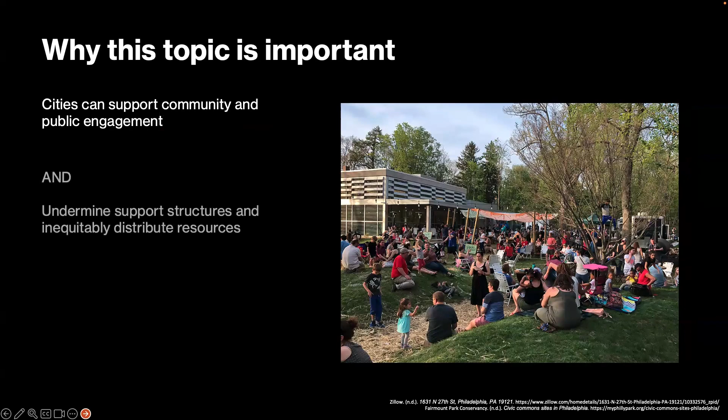So first, I'd like to start with why this topic is important. Well, cities are made up of spaces that can be beautiful, welcoming, and healthy. And they can be unwelcoming, isolating, and impair well-being. Cities can support community and public engagement, and they can undermine support structures and inequitably distribute resources.

Cities can regenerate the ecosystems that have been removed for development and support the services they naturally provide, such as cleaning the air and water, absorbing stormwater, growing food, and providing open space for improved mental and physical performance of their occupants, such as this proposal for FDR Park.

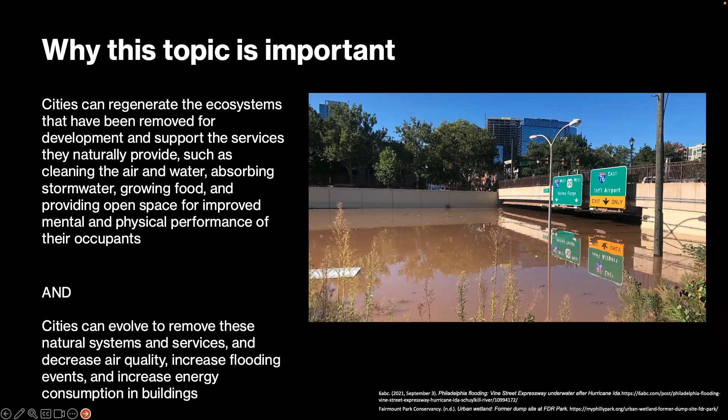And cities can evolve to remove these natural systems and services, decreasing air quality, increasing flooding events, and increasing energy consumption in buildings.

Cities are systems comprised of elements in a complex relationship, such as people, communities, homes, office buildings, hospitals, parks, and all of the infrastructure to serve them. These systems can be designed, developed, and integrated to support community engagement, improve city performance, and occupant well-being. And they can be designed, developed, and lack integration to instead support different values and very different outcomes.

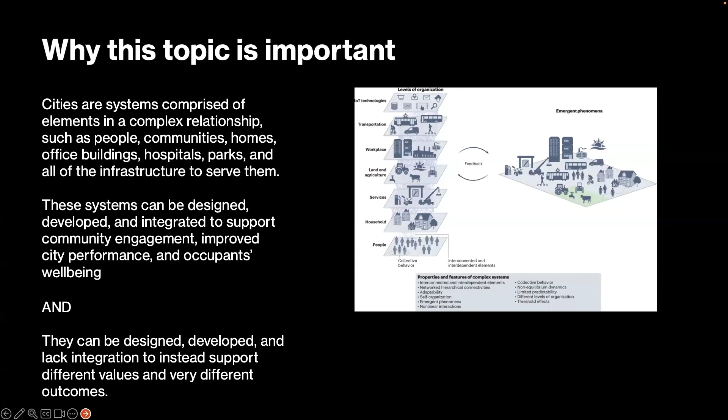Every system is perfectly designed to achieve exactly the results that it gets. And so the major point that I'd like to present to you today is that the environment created by a city is powerful and has a very significant impact on our individual and collective lives.

Dr. Claudia Miller became known for perhaps a controversial statement that says architects and designers have a greater ability to improve public health than medical professionals.

In fact, the architectural profession itself has a code of ethics and professional conduct statement document, which has at its core that architects must use their professional knowledge and skill to design buildings and spaces that promote the health, safety, and welfare of individuals and the public.

And of course, it being made of professionals themselves, they sometimes critique the professional code of ethics and professional conduct and urge for its development.

And indeed, in 2018, they added an additional statement to Canon 2 about their obligations to the public to now include environmental equity and justice, where members should promote fairness and safety in providing professional services and make reasonable efforts to advise their clients and employers of their obligations to the environment.

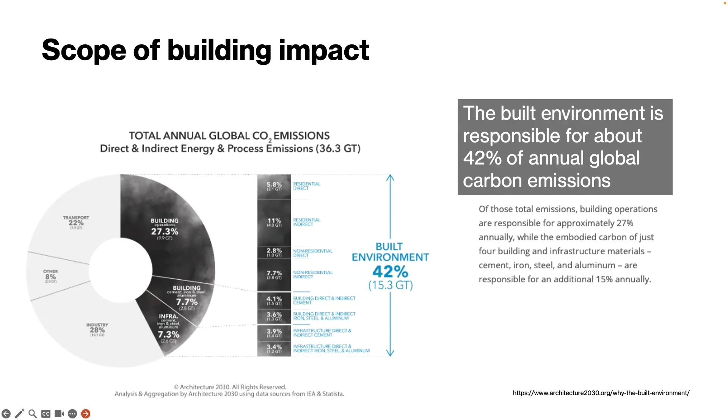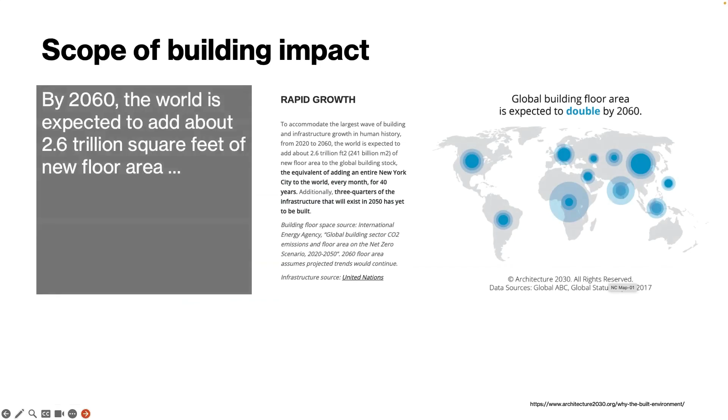There is also projected rapid growth in development globally. By 2060, the world is expected to add about 2.6 trillion square feet of new floor area. So to give you some perspective, that's the equivalent of an entire New York City added to the world every month for 40 years. So this could be a very pessimistic look forward, especially if we are just thinking that we are going to keep designing the way that we have been.

But I would like to argue that this is also an opportunity for us to choose a different direction and to design differently. And I'll give you some examples of how we could, as a profession, all of the design professions could start to design differently so that this development could take place, but our emissions could actually come down.

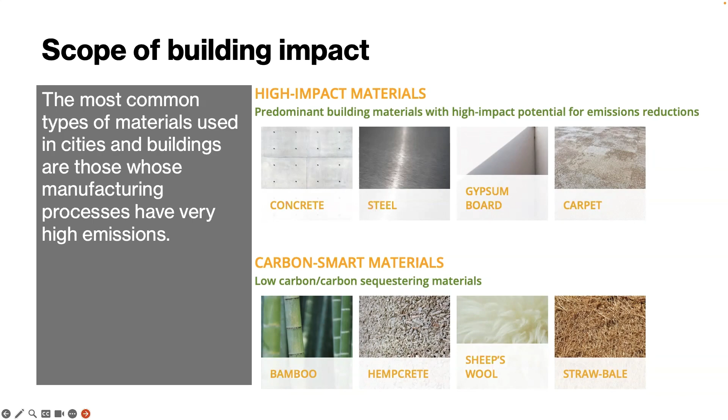So there are high impact materials and some carbon smart materials, and the material choices we make are extremely important because of what's called embodied carbon. The most common types of materials used in cities and buildings are those whose manufacturing processes have very high emissions. We're talking about the process to extract a material, ship it to another facility to manufacture and produce it, all the energy involved in that process, and then eventually shipping it to a site and putting it into use in construction. So all of the energy for materials right before people move in and start using the building is called embodied carbon. The types of materials we use can make a huge difference on the carbon emissions associated with buildings.

Specifically, we want to avoid the use of concrete, steel, gypsum board, and carpet—those are the high impact materials. There are other materials we could use that are low carbon, carbon sequestering materials, such as bamboo. I would also add in timber, hempcrete, sheep's wool, and straw bale.

Now let's go on and look at the scope of the health impact. We'll look at heat illness, air quality, vector-borne disease, and mental health. Looking at the heat vulnerability in Philadelphia, we see here a map from the city of Philadelphia indicating the heat vulnerability score, which summarizes the key factors associated with negative health effects of extreme heat events. This report, Toward a Climate-Ready Philadelphia, suggests that extreme heat events in Philadelphia will increase in duration, frequency, and intensity due to climate change.

The neighborhoods highlighted on this map will feel it worse than others. The Centers for Disease Control and Prevention state that extreme heat events can lead to a wide range of health problems, including heat exhaustion, heat stroke, rashes, and cramps, as well as worsening existing medical conditions. Social and demographic characteristics like age and socioeconomic status contribute to a person's sensitivity to extreme heat, and those are reflected in this map, which includes the population's sensitivity to heat effects, its exposure to hotter environments, and the population's ability to adapt to extreme heat.

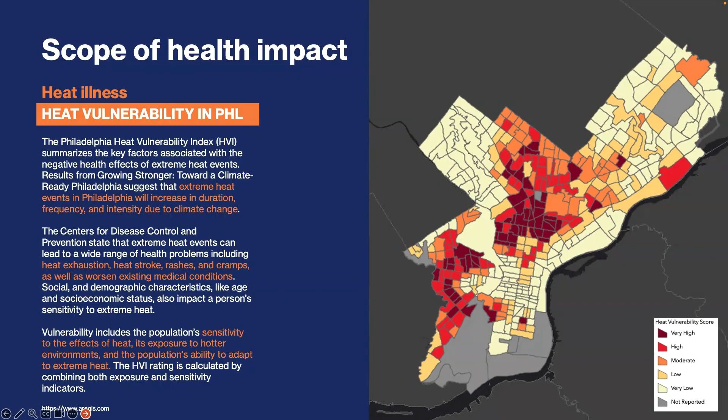The built environment definitely comes in here with a population's ability to adapt to extreme heat, and we'll be discussing some of those adaptable behaviors later on.

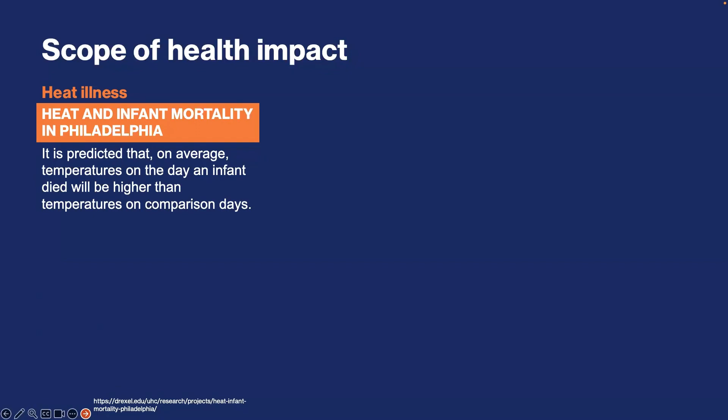According to research out of Drexel, heat and infant mortality are also linked in negative health outcomes in Philadelphia. It's predicted that on average, temperatures on the day an infant died will be higher than temperatures on comparison days. They also hypothesized that these associations are stronger among infants living in census tracts with higher percentages of residents living below the poverty line, with less than a high school diploma, and who are Black and African American—areas showing very high and high rates of heat vulnerability. Lastly, these associations are expected to be stronger among infants who had less tree canopy and less vegetation near their homes.

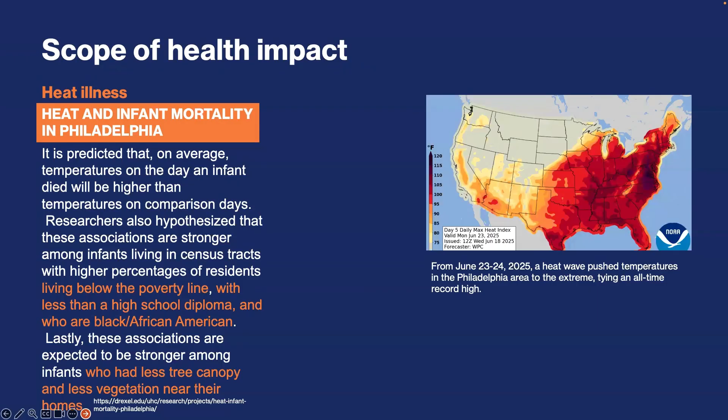So we can remind ourselves that indeed heat is increasing, and these could become greater issues to deal with. In 2025, a heat wave pushed temperatures in the Philadelphia area to the extreme, tying an all-time record high. The Philadelphia region also sees record temperatures. A report shows that heat illnesses and health risks among indoor service workers is widespread, and the most recent decade was the warmest on record. Given the rising average temperatures, heat represents an increasingly important factor in the work lives of people in the US and globally, and we can expect more of this to happen in the future.

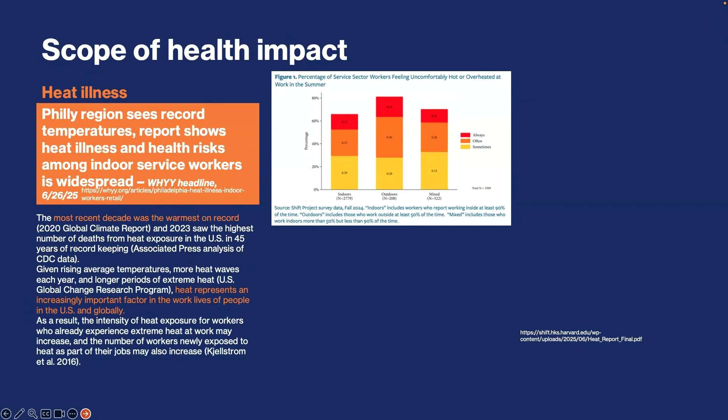If we look at air quality, the Philadelphia metro area ranks worst, most polluted in the mid-Atlantic, the 35th worst in the US for ozone smog. We do show some improvement for particle pollution, but we still earn a C for daily and an F for annual particle pollution.

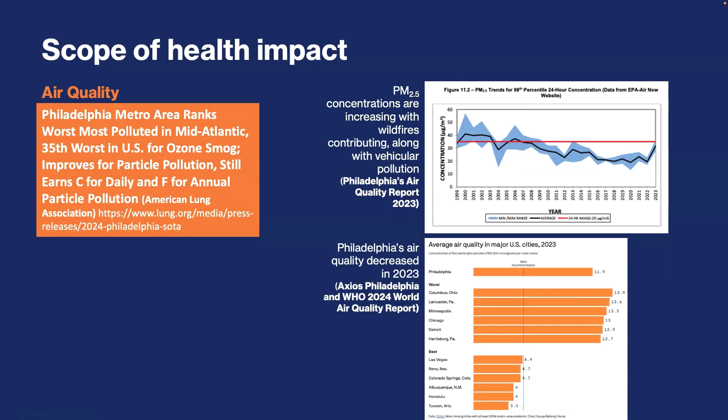If we look at vector-borne disease, two main contributing factors are increased temperatures and increased interaction between people and these vectors. Temperatures are increasing, making it more hospitable for some of these insects and pathogens. And by virtue of where people are encountering these, that is increasing as well due to development. So climate change is altering the regions where vectors, such as insects and pathogens, can live and thrive, and increased development brings humans into more contact with these vectors.

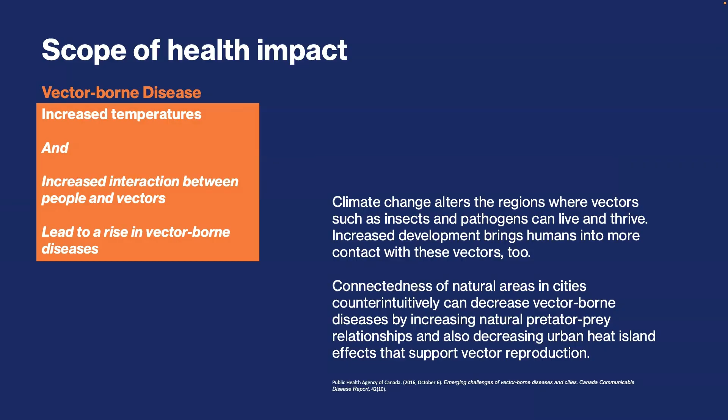Now, an interesting thing is that if we add additional green spaces and green infrastructure like parks and pocket parks, that connectedness of natural areas in a city can actually, and perhaps counterintuitively, decrease vector-borne diseases. That's because when you increase this connectedness, there are more natural predator-prey relationships that are able to take place. But it's also because the temperatures will go down, since we will be decreasing the urban heat island effects that support vector reproduction. In case you don't know what the urban heat island effect is, I will also be discussing that later in this presentation.

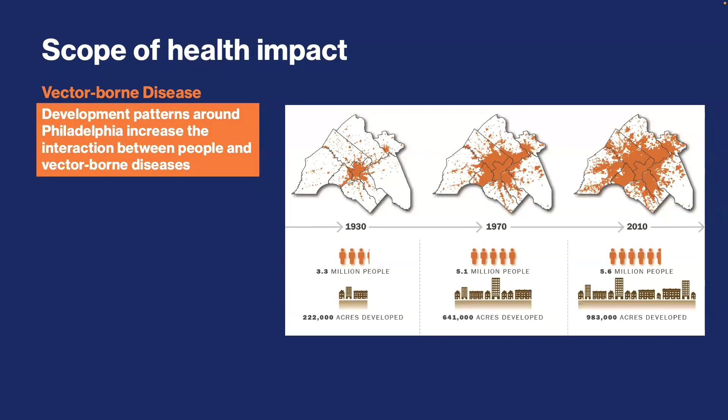This shows the development patterns in the Philadelphia area since 1930. You can see that we have been exploding in the surrounding environment, and so the development patterns around Philadelphia are increasing the interaction between people and vector-borne diseases.

Here is an example of that, where the Philadelphia Department of Public Health has identified 3 symptomatic West Nile virus infections in 2025. 2 of them were locally acquired. And if we look at the positivity in WNV, in 2025 that positivity is higher than the year-to-date historic median rate from 2001 to 2024.

Mental health is greatly impacted by the built environment. Human beings spend more than 90% of their lives indoors. Yet, according to Evans here, whose research I'm pulling this information from, we know much more about ambient environmental conditions and health than we do about the built environment and health.

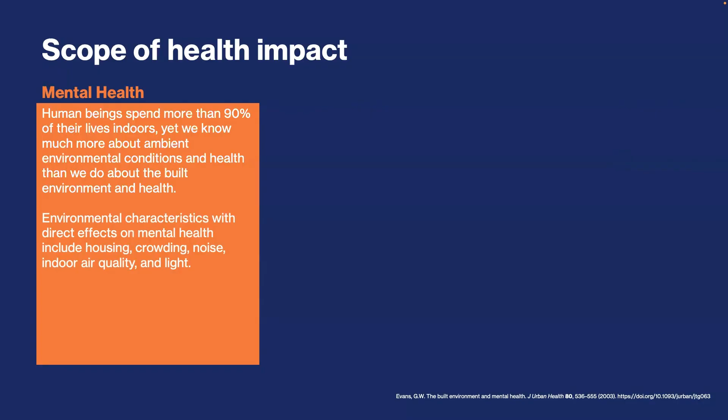There are some environmental characteristics with direct effects on mental health, including housing, crowding, noise, indoor air quality, and light. The built environment controls mostly those environmental characteristics and how they design buildings, cities, and neighborhoods. And the built environment can indirectly impact mental health by altering psychosocial processes with known mental health consequences.

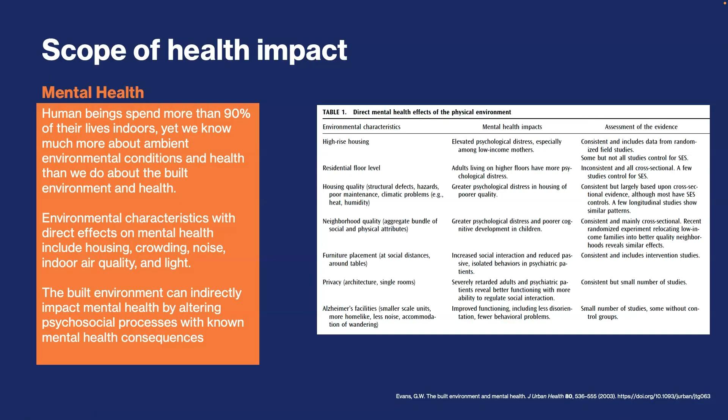The quality of housing, like structural defects, hazards, and poor maintenance, leads to greater psychological distress in housing of poor quality. Neighborhood quality, and how socially connected these spaces are, can also contribute to greater psychological distress and poor cognitive development in children. Even looking at Alzheimer's facilities, designing them with smaller scale units that are more home-like, with less noise and that accommodate wandering, has been shown to improve functioning, including less disorientation and fewer behavioral problems.

Dr. Ulrich is probably a more well-known researcher for architects, and definitely for sustainable designers, because of some of his research. This research shows that modifications can be made to reduce hospital noise, prevent the spread of infectious agents, reduce stress and fatigue, and more, through design rather than modifying staff behavior and organizational culture.

What Ulrich really became known for was a study he did in 1984 that compared patients who had undergone surgery, where half of them stayed in a room with a view of a park with deciduous trees, just a nice view out of their window, while the other half were in a room with a view of a brick wall. And guess what? Those with the view of nature required less analgesia and had reduced length of stay in the hospital.

This became part of the evidence used to support a hypothesis called biophilia. Biophilia is the notion that humans have evolved to recognize spaces and places where their well-being would flourish. Thinking about migration patterns over the course of evolution, starting in Africa and then moving out, humans seem to have an innate, evolved ability to recognize healthy spaces over unhealthy ones, and that this has an impact on both our mental and physical well-being. This study by Ulrich supports that.

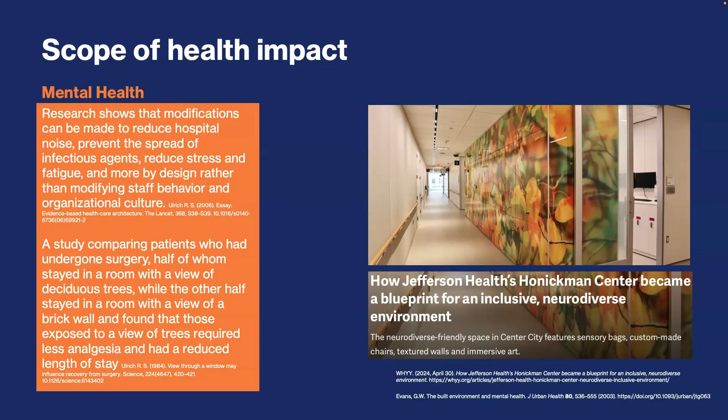Now this idea of biophilia has moved into design, where a lot of design is focused on trying to connect people to nature to achieve exactly these sorts of positive outcomes. We see an example of this even with Jefferson's own Honickman Center and how it has been designed. Studies have shown that even facsimiles of nature, although not as great as being really in nature, still have a positive outcome, such as the blossoms and trees printed on this wall. These things can be used as part of the design of the built environment.

Let's take a closer look now at climate drivers. Climate change really is a global phenomenon that has a local impact, and that's mostly how we experience this global phenomenon. The largest contributors to this are greenhouse gas emissions and land use change.

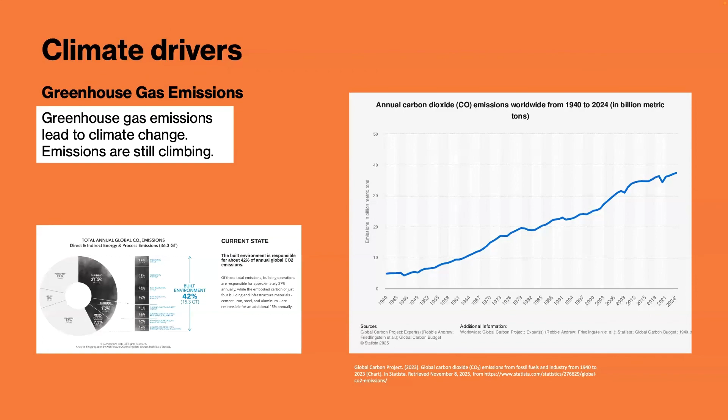As I touched on briefly earlier, greenhouse gas emissions lead to climate change, and emissions are still climbing. If we look at the graph on the right, this is the annual carbon dioxide emissions—it says dioxide but only shows CO, that is not my error—worldwide from 1940 to 2024. Clearly there's an increasing trend, and we're all expecting that to just increase. Just a reminder that of these metric tons of CO2 emissions, 42%, almost half, is from the built environment.

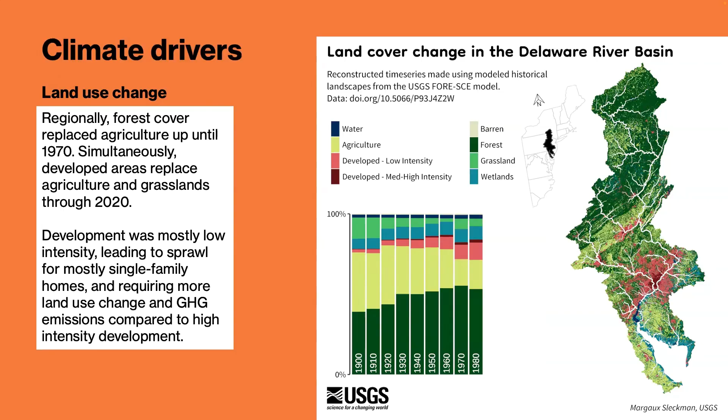So this is a major driver of climate change, part of which is parking lots. We have a lot of parking, as many cities do, but ours is about 3.7 times greater than our housing density. Now, the bad news is that most of these are what are called off-street, but on the surface. So these aren't the ones that have multiple levels to parking. These are ones that are just on the surface, and that is it. So it's not an efficient use of space because you're not parking ones above that space, like in a structured parking lot.

So now let's talk about the urban heat island effect. This is a phenomenon that happens around all cities, not just Philadelphia, and it's because of the materials and the geometry of the buildings. The fact that there are a lot of high-rise buildings makes the situation worse, it increases the urban heat island effect. So what this basically says is that the temperatures, if you were to scan the greater Philadelphia area, are going to be lower in our suburbs and rural areas than they are in the city.

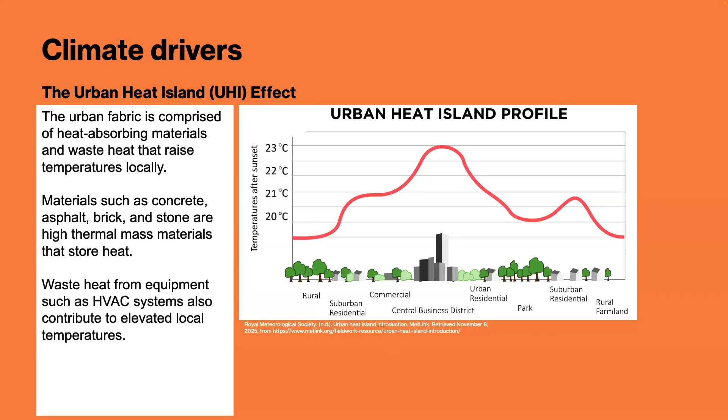This is because the urban fabric, as we call it, is comprised of heat absorbing materials and waste heat that raise temperatures locally. Materials that we always find in cities, such as concrete, asphalt, brick, and stone, are high thermal mass materials that store heat. Thermal mass materials just mean they have a lot of thermal mass where they can absorb and store heat within them. There's also waste heat from equipment such as HVAC systems, which also contributes to elevated local temperatures.

So in Philadelphia, what we find is that compared to the suburban and rural areas, our temperatures are 5 to 12 degrees higher on average, but there are some specific parts of Philadelphia that can be as high as 22 degrees hotter than other neighborhoods. So the urban heat island effect is among the top two issues that Philadelphia faces from climate change. The first probably being flooding, but we'll get to that later.

So with land use change and development, we see that the ecosystem services that we tend to take for granted get replaced with parking lots, with buildings, with roads and streets. Ecosystem services are those things that nature provides to us for free that are systematically removed by land use change. Now, these services are not part of economic models. So the change of land use, or the fact that we don't have clean water or less biodiversity, does not negatively impact our GDP, right?

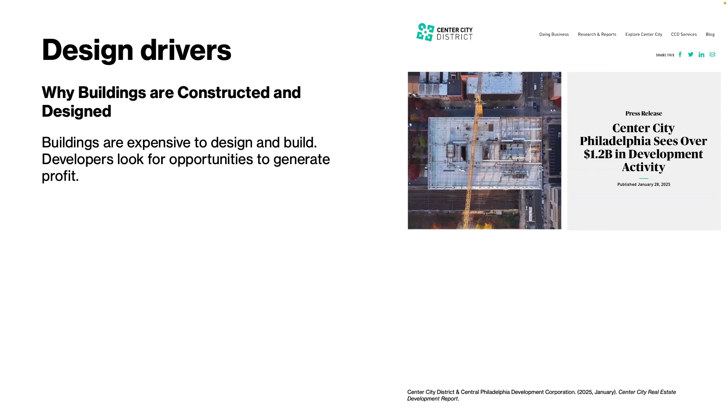And there has been a lot of economic construction activity over the last year in Center City, where it's seen $1.2 billion in development activity. And what kind of activity was that? Well, it was mostly residential, and then had mixed use, healthcare, and education as the top three.

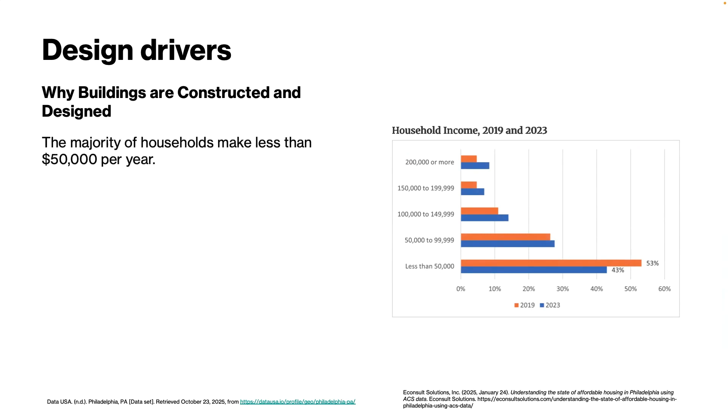So the large majority of new construction is residential, which is good news, right? It should be because there's a strong need for housing in Philadelphia. So let's look closer at what housing was created, at housing and household income. We can see that the majority of households make less than $50,000 per year. Actually, Philadelphia has more families and people below the poverty level compared to both Pennsylvania and the US.

And so those who make less than $50,000 per year are also house burdened, with housing costing the majority of them 50% or more of their income. In fact, you are considered to be house burdened if you spend more than a third, or roughly 30%, on mortgage, rent, and all of the utilities for your home.

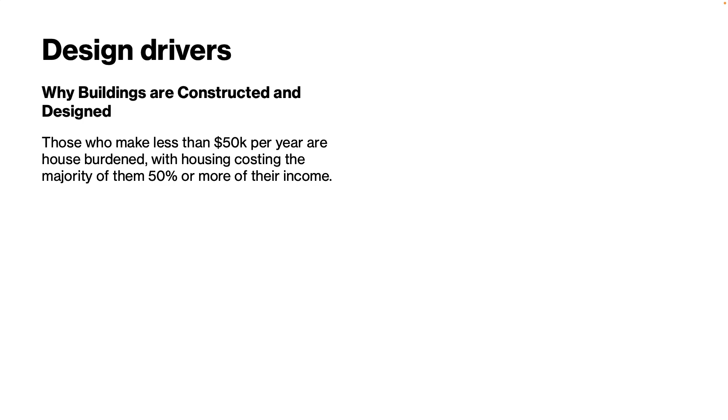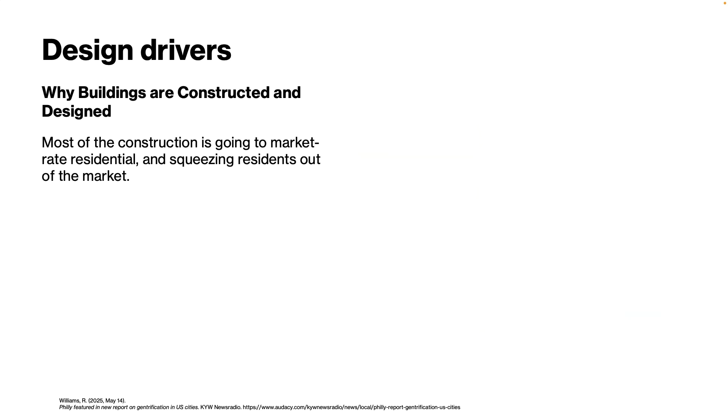However, there aren't a lot of options for those living with an income below $50,000. And so a lot of that new construction is not geared towards them. It's rather geared towards profit. So most of the new construction is going to market rate residential, and what happens is it tends to squeeze residents out of the market. Neighborhoods that they have been living in, probably for quite a while in some cases, the costs are suddenly going up because development is happening in their neighborhood now. And so that spreads around the city. That's a process known as gentrification.

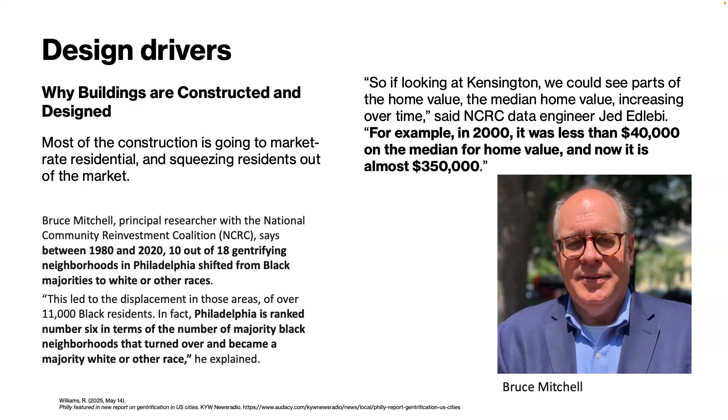Bruce Mitchell, who is principal researcher with the National Community Reinvestment Coalition, says that between 1980 and 2020, 10 out of 18 gentrifying neighborhoods in Philadelphia shifted from Black majorities to white or other races. Philadelphia is ranked number 6 in terms of the number of majority Black neighborhoods that turned over and became majority white or other race. And if we look at Kensington, the median home value has gone up from $40,000 in 2000 to $350,000. So it's a huge increase in home value and home cost.

In fact, we need to be very careful as we add green infrastructure for other very laudable reasons, because that tends to lead to gentrification, as gentrification first surrounds all park sites. So as we add green infrastructure, we must at the same time have community-led greening projects paired with social housing policies. There's a lot of development, but we're lagging behind in Philadelphia with that community-led greening project and social housing policy counterbalance.

Which gets us to the question, then, who do our buildings ultimately serve?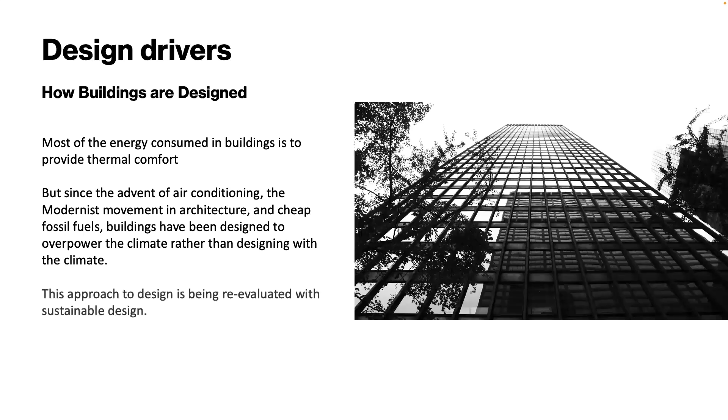This approach to design is being reevaluated with sustainable design, however.

I want to talk to you in a little more depth about thermal comfort, because it is important. The most operational energy is consumed to deliver thermal comfort, because it is the foundation to providing healthy, comfortable, and energy efficient buildings. It's a component of health, a component of productivity, and it directly dictates how much energy is consumed and therefore how much greenhouse gas emissions are generated, at least as long as we're using fossil fuels.

So you may be able to relate to this meme here. It's certainly true in some of the buildings I have experienced across campus. It just goes to show you that it's really hard to be productive and healthy if you're walking into an office that is 59 degrees or whatever.

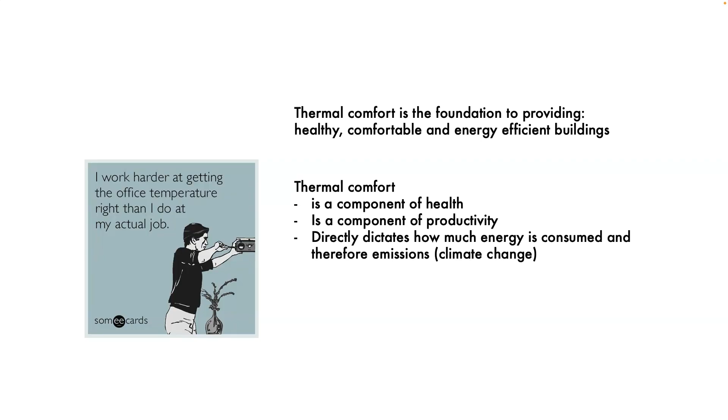So what is thermal comfort? I find this definition to be really interesting. As defined by ASHRAE, the American Society of Heating, Refrigerating, and Air-Conditioning Engineers, in their Standard 55 which defines this: thermal comfort is the condition of mind that expresses satisfaction with the thermal environment and is assessed by subjective evaluation.

Why I think this is so interesting is because of the words I've highlighted in red. What is really perceived to be an objective measurement applied by engineers actually comes down to subjectivity. Whether or not we are comfortable is a state of mind, our own mind. One person may be very comfortable, and the person sitting next to them may not be. You may have experienced this in your home or work, and you may have noticed that as you've gotten older, you don't find the same conditions comfortable as you once did. So the idea that at the base of all of this objectivity, perceived objectivity, and global climate change, is actually a subjective experience, I find to be very interesting.

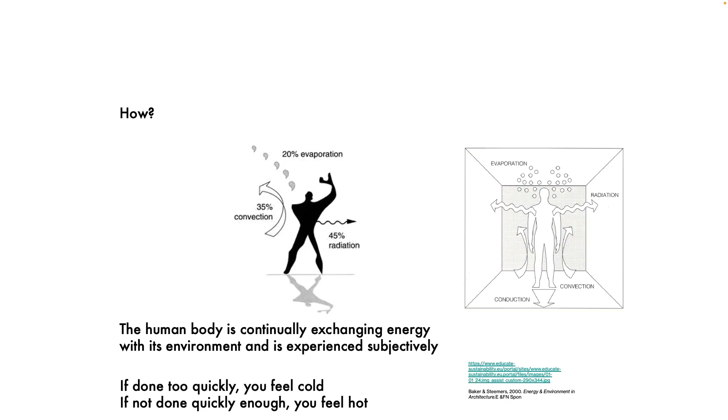So how does this happen? How does thermal comfort happen? Well, the human body is continually exchanging energy with its environment, and that is experienced subjectively. As this image suggests, we tend to do most of our exchange via radiation, or our body prefers to exchange energy with its environment using radiation. This can help explain why we love to be close to a fire as it radiates its heat, or why people find heat from radiators in a building to be much more comfortable and preferable to a duct blowing hot air. So if this exchange of energy happens too quickly, we feel cold, and if it's not done quickly enough, we tend to feel hot.

So we're in the middle, we're at number 4. We are actually in 4A, which is known as a mixed humid zone. So we have both periods of the year where we need heat and cooling, and we also have the added benefit of being humid. It's a very hard place to consume less energy, but there are ways we can do it. The 4A climate zone means it's mixed. We have both heating and cooling happening, and some years our heating demands dominate because our winters get much colder.

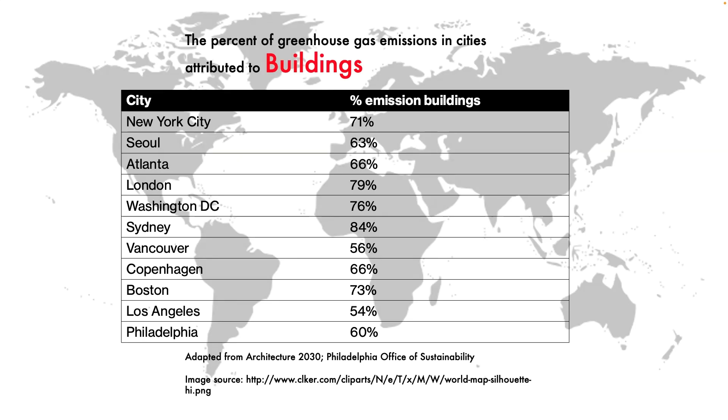If we look specifically at cities, cities are responsible for 75% of all human-produced global greenhouse gas emissions. If we look at that 75% to see how much is attributed to buildings, we get emissions like this. The highest on this list looks to be Sydney, Australia. The lowest for buildings is Los Angeles. And in Philadelphia, we come in near the bottom of that list at about 60%.

Buildings consume nearly half of all the energy produced in the United States. But if we look only at electricity, we consume nearly 75% of all the electricity in the United States to operate.

Now, if we look at our emissions over time, since 2006 and 2022 in Philadelphia, you can see we have gone down, and that is excellent. We are doing a good job with that.

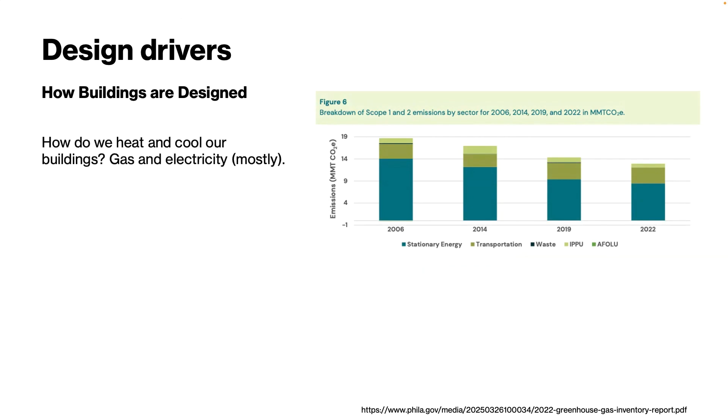Another thing natural gas has, in addition to higher global warming potential than electricity, is an upstream, meaning before we even use it in our building, upstream methane emissions from extraction.

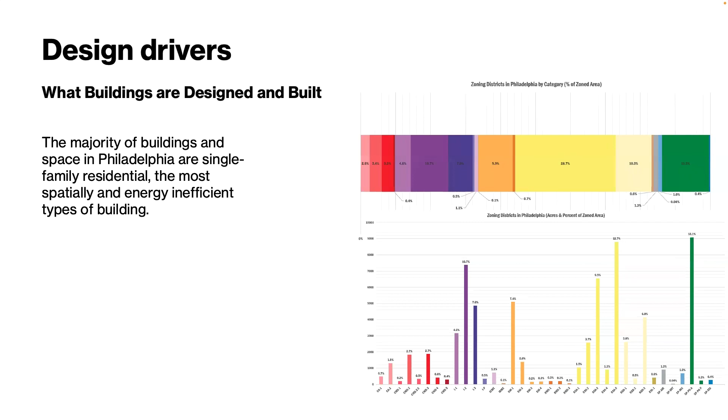So let's take a look at what buildings are being built in and around Philadelphia. The majority of buildings and space in Philadelphia are single family residential, the most spatially and energy inefficient types of building. We can see the ones in orange, yellow, and this other color are related to housing, and we can see it's the same information presented in a different way. You can just see that the majority of development in and around Philadelphia is for single family homes, and this is how it's spatially distributed across the city.

So not only are we mostly building single family residences, the single family residences have exploded in size over time. In 1950, the average floor area was about 1,000 square feet for a home. In 2000, that has grown to 2,200 square feet. Now, the other interesting thing is that as our houses have increased, the number of people living in them has decreased. In 1950, there were 3.37 people per household on average. In 2000, there were 2.62 people per household.

Or if we look at that a different way, in 1950, there was 297 square feet per person. Whereas by 2000, that has exploded to 840 square feet per person.

Let's take a look now at the impacts of all of these current drivers, like the urban heat island effect, the increase in number and severity of flooding events, increase in operational and embodied carbon, decrease in air quality, and impact on infrastructure. The urban heat island effect is greatest where there are fewest trees.

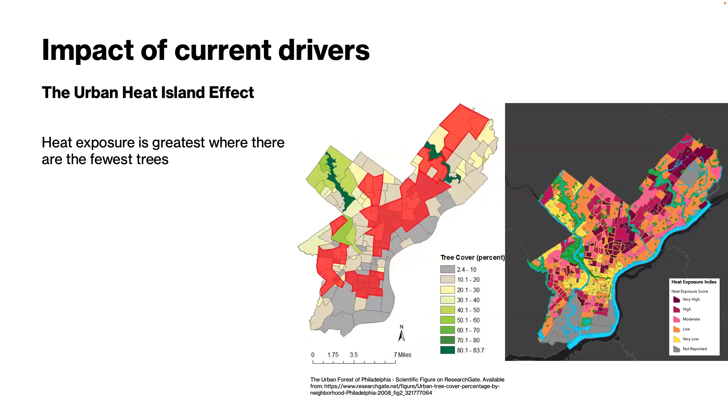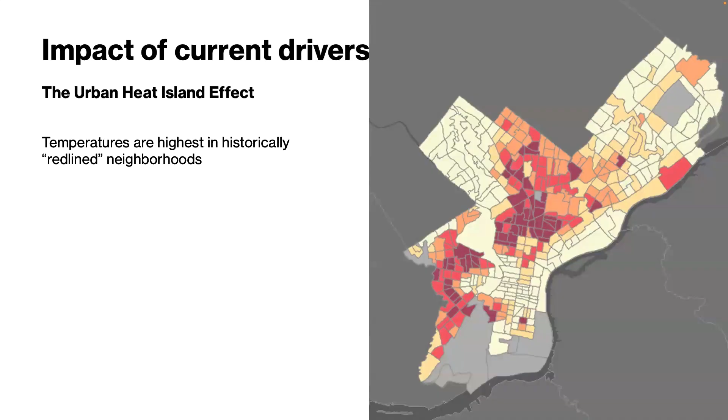Philadelphia is located at the lower end of major watersheds, and it's also at the lowest elevation. So we're basically sitting in a bowl that is receiving streams of water from all of these different watersheds.

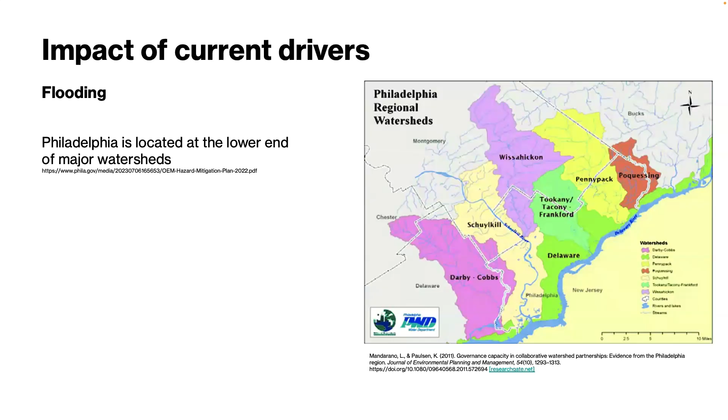Some densely populated areas have a high risk for flash floods as the construction of buildings, highways, driveways, and parking lots increases runoff by reducing the amount of rain absorbed by the ground.

You know the song—they paved paradise and put up a parking lot instead. What that does is remove the ability for rain and other water sources to be absorbed by the earth. Instead, the earth has been sealed on top by concrete or asphalt, and the water has to run across that surface. At the scales we're talking about across the city, it leads to outcomes like this.

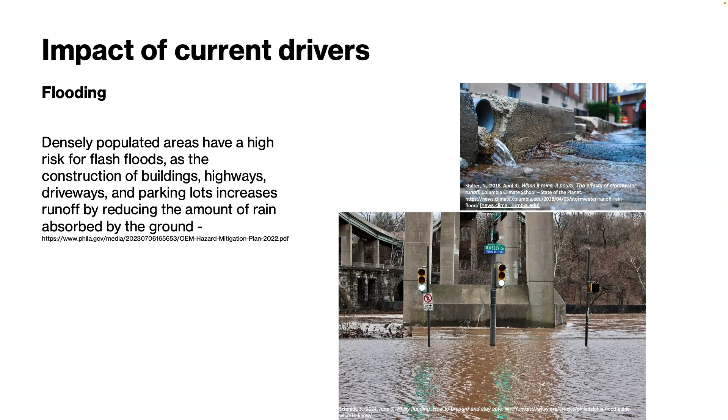There are two communities in Philadelphia located in high-risk flood zones that see some of the greatest impacts from this. The first is Eastwick, which has experienced extreme flooding events going all the way back to the 1930s, then 1999, 2020, and again in 2023. Eastwick was a wetland, located at the very bottom of that bowl where all of those streams are running into it.

All of those watersheds—it used to be marshland, a wetland, and we've removed the wetland and instead put an entire neighborhood. So it's no surprise really that Eastwick is flooding.

The other neighborhood is Manayunk, and we've seen over the past 10 years a couple of floods—Hurricane Ida and another one in 2017, which had some really negative outcomes for Manayunk. You can see the trees kind of flooding away.

You may have dined outside on this patio, which you now have to understand the height of—it's tens of feet above where the water line usually is.

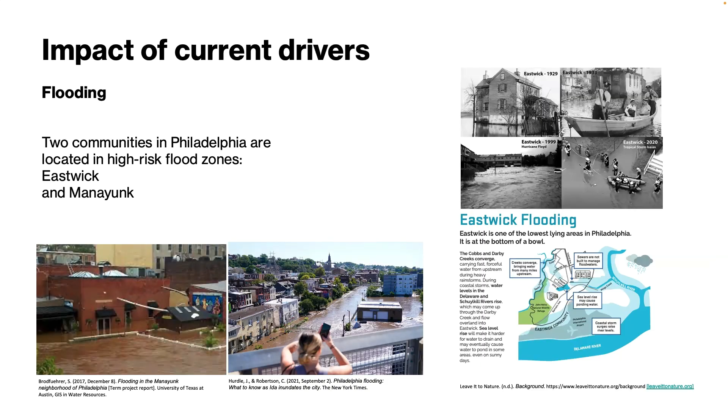This flooding also leads to river pollution, and to understand why, we need to look at a little bit of history. Philadelphia's sewer system was originally designed and built in the late 1800s and early 1900s, and since then the amount of impervious area in the city has drastically increased. But this was the state-of-the-art system at that time, where streams were diverted into pipes.

This was actually a way to protect clean water at that time from contamination before it reached the Schuylkill River, which was and still is the source of our drinking water. But at the time, it was the largest infrastructure project ever undertaken, and to make it more efficient, the pipes carrying streams were engineered to carry wastewater from indoor plumbing as well—known as a combined stormwater sewage system.

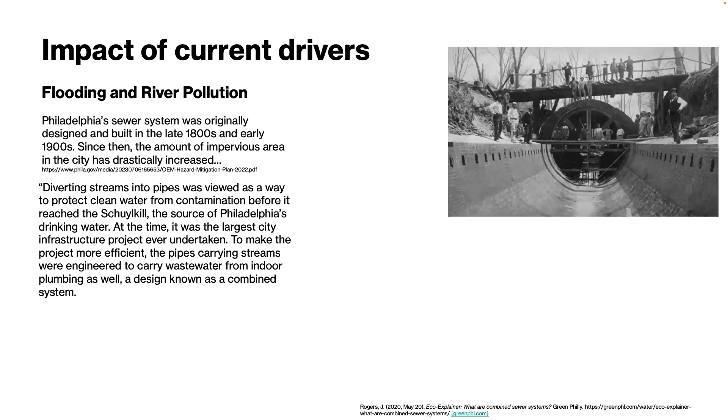So what that means is that rain which used to soak into the ground now quickly runs across impervious surfaces and into sewer systems. When large amounts of precipitation fall over a small area in a short period of time, this can overwhelm the sewer system and pollute the river with raw sewage.

That is because if we look at what happens during dry weather—sewage runs, you flush the toilet, sewage runs into the system, and during normal times it then channels back and goes to the treatment plant.

However, when there's wet weather, there's also an addition of a lot of water coming through the storm drain, and the system can't handle that. So as designed, it's just meant to divert all of that outflow, including raw sewage, to the river. So it pollutes our water.

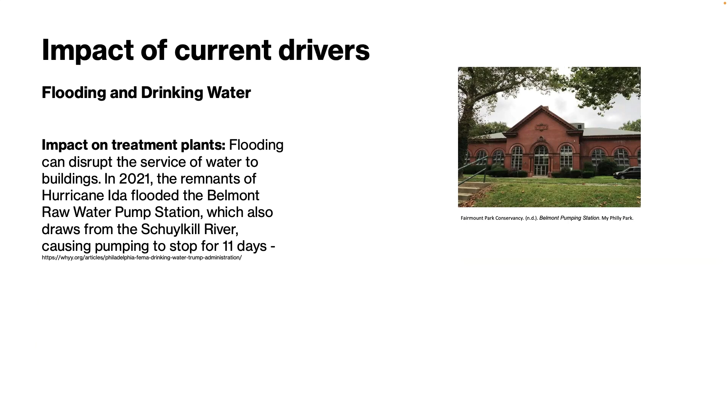Flooding can also disrupt the service of water to buildings. So in 2021, Hurricane Ida shut down the Belmont pumping station, which interrupted water service for about 11 days.

And believe it or not, we are also at risk from sea level rise. Although we're separated from the ocean by New Jersey, the Delaware River is not. And so as sea level rise increases, the salt line moves further and further up the Delaware River, and there's a threat that it could reach the city's drinking water intake. That causes a huge problem, because our existing water systems won't be able to remove the salt, to desalinate the water. So we would have a serious threat to our drinking supply.

Greenhouse gas emissions across all sectors of Philadelphia's economy dropped 31% between 2006 and 2022, which I showed before, and that is great news. It's not enough, but the fact that we are trending downward is great news. A third of those reductions happened since the city's last inventory in 2019.

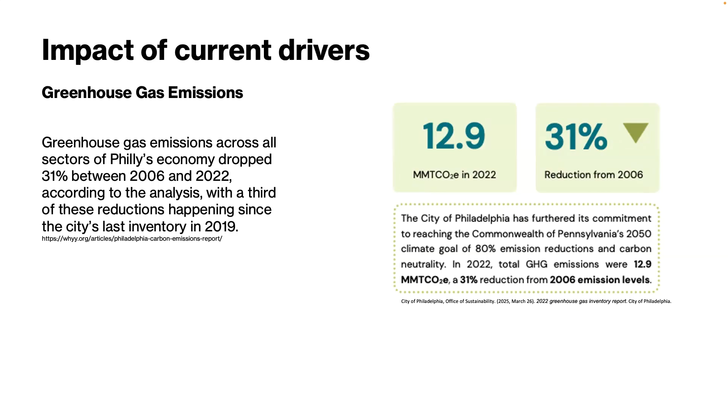So something special must have happened then, and indeed it was this: the Philadelphia Energy Solutions refinery caught fire and as a result was shut down. That alone was responsible for 16% of the city's total carbon footprint. So this, in combination with some more modest savings from energy efficient buildings and green infrastructure, is what led to that 31% drop.

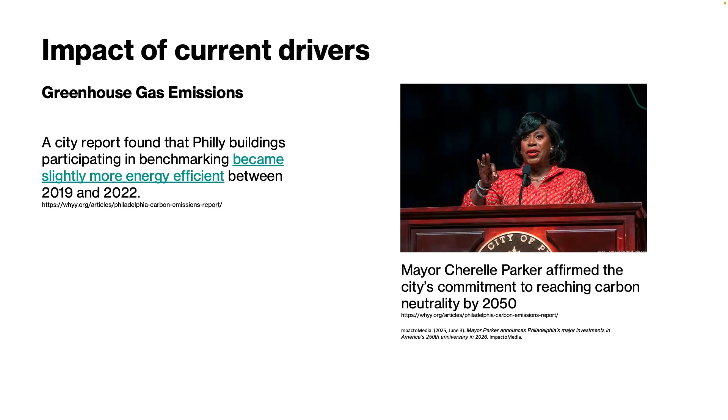And there is a commitment from Mayor Parker that we are still committed to reaching carbon neutrality by 2050.

Air quality: Philadelphia was one of 17 Pennsylvania counties that received an F grade for particle pollution in the American Lung Association's latest annual State of the Air report, as I mentioned previously. This rating is based on the city experiencing more than 5 days of unhealthy levels of particle pollution on average per year from 2021 through 2023. The source of those pollutants are mostly construction sites, fires, vehicles, and power plants.

So to sum up, transportation, air pollution, flooding, greenhouse gas emissions, etc. — basically all of these impacts are in turn impacted by how a city is designed. A city is a complex system, and designers do not, and cannot with the existing tools they have, take into account the many relationships between these drivers. What we need is a different approach to design, with new tools and frameworks.

What I want to talk about now is some of these new tools and frameworks we can use. I'm going to give an example from the Sustainable Design Program, what we use and teach our students, but also make a connection to what the AIA is now proposing as a new process as well.

So the processes that we use are what's called the Integral Sustainable Design Framework and Systems Thinking. The Integral Sustainable Design Framework is a method by which we look at things through four different lenses: experience, performance, culture, and systems.

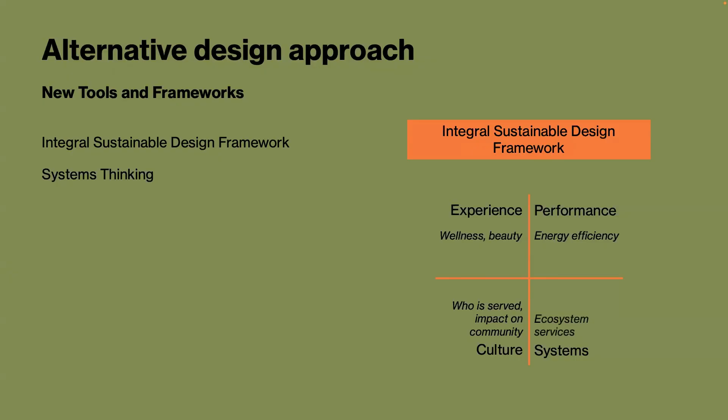When we talk about experience, we're talking about one's subjective experience, such as wellness, beauty, how you feel in a space — do you feel too cold or too hot. Performance is about energy efficiency. Culture is about who is being served and what the impact is on a community from a design. And systems is about ecosystem services and trying to regenerate them.

A way I like to talk to students about integral sustainable design is by using this ancient parable from India, in which blind people are asked to investigate what an elephant is. Each of them only feels a small portion of that elephant.

And they walk away thinking, well, the elephant, the one who's touching the ear, is really flexible and maybe even fan-like. And the one feeling the leg comes away with a very different idea about an elephant being something very solid, like a tree trunk. None of these people would walk away with wrong ideas, just incomplete ideas.

That is how designers are when we think about the design of the built environment. We see a portion of the whole picture. By using a methodology like this, we can combine those different perspectives into one. And when we use them simultaneously and think across different scales, the designs will be more holistic.

So if we map the topics I've been discussing using the integral sustainable design framework, we can see that it covers all of these issues. It is a pretty good tool to talk about something comprehensively. We're talking about mental health, physical health, and beauty, community health impacts, energy efficiency, greenhouse emissions, and temperature increase, land use change, and the removal of ecosystem services.

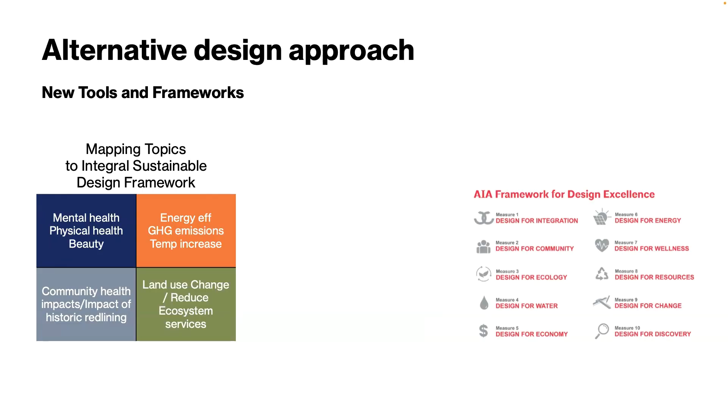Now if we look at a very recent framework for design excellence proposed by the AIA, they have these 10 different segments. I wanted to see for myself, are they using a comprehensive lens when talking to the broader profession of architecture? And in fact, they are. These 10 different things map perfectly onto the integral sustainable design framework. So I'm excited about this AIA framework.

Now, we learn different things when we look through these perspectives, but we don't understand the relationship between them. That is where systems thinking comes in. So we can use systems thinking diagrams as tools to start to investigate and understand what's happening.

And we can use it to research, for example, what is the urban heat island effect. And quickly, when you know how to read these, you can see that there is a reinforcing loop happening and a balancing loop, and they are in competition with each other.

So for example, I will turn on the air conditioner to change my indoor microclimate so that I feel comfortable. Now I have it set to a thermostat, so whenever the temperature isn't right, it will turn on the air conditioner, and it'll keep doing this until the 70 degrees or whatever temperature you have set is reached. However, at the same time, that air conditioner is rejecting its waste heat and increasing the outdoor temperature, which will come back and impact my thermal comfort inside the building. So I'm cooling my building down inside, but heating up the area outside.

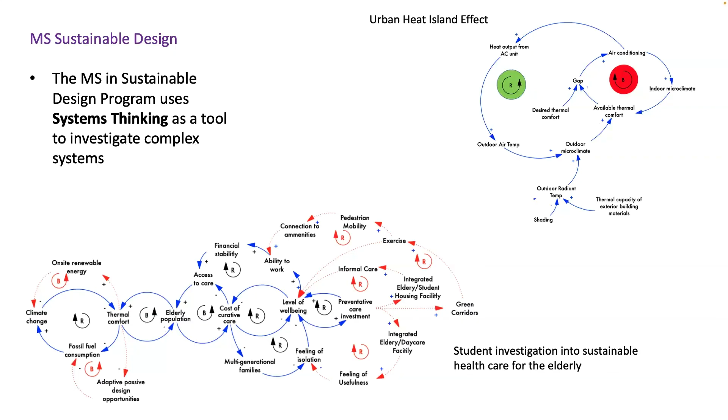So let's look at how Philadelphia now is seeing an impact from resilient and sustainable design strategies. We'll look at how the urban heat island is being mitigated, how greenhouse gas emissions are being mitigated, how we're adapting to flooding events, mitigating poor air quality, and some other synergies, bonuses we get for free from one solution.

Because we're all a complex system, one solution can actually have impacts further upstream or downstream that we're not specifically designing for. So if we look at how to regenerate ecosystems, we can talk about the addition of trees. If we think about that systems map for a second, that would be adding another balancing loop, putting more pressure on the brake pedal to combat increasing temperatures, and that would have an impact on the outdoor air temperature.

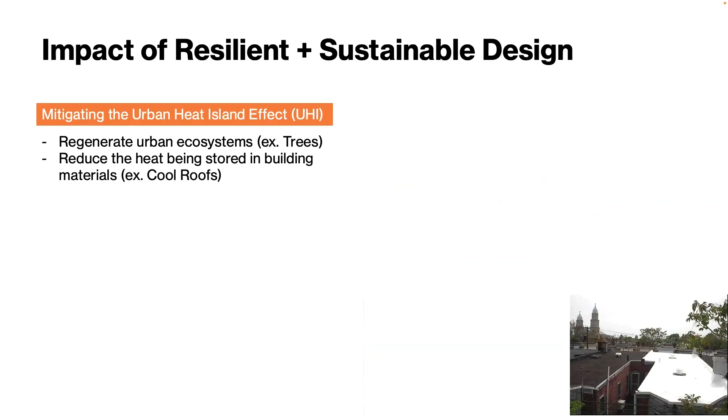But we do have street tree programs, and this is just an example of one in Philadelphia where that is being added. We're also installing things called cool roofs. White roofs reject and reflect more heat than black ones, which absorb heat, so those can reduce the urban heat island effect as well.

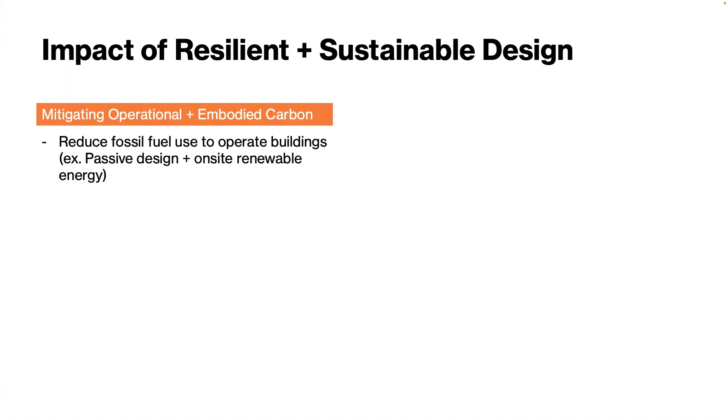What a passive house project is, it's a very high performance building, very high levels of insulation in the walls, special windows that are also high performance. And so this building can run in a mixed use environment or mixed climate, as I mentioned before, very well, and reduce both the heating and cooling needs during those seasons.

We can also reuse existing buildings and materials. There is a saying in my profession that the greenest building, the most sustainable building, is the one that already exists. Meaning you don't need, if you can adaptively reuse a building, adapt it to its new use without having to use all of the new materials and all of their embodied carbon in a new building, then you have almost halved the emissions associated with that building.

And so here is an example. Remember, this building I'm showing here is passive house, that really high performance version of a building. You can do that same thing with an existing building, as showcased here from Bright Common, which is a design firm headed by Jeremy Avellino, who is also a faculty at Thomas Jefferson University. So he was able to get extremely high performance rates out of this building. You can see here the heavy insulation that is done, and then the final image of what that building is.

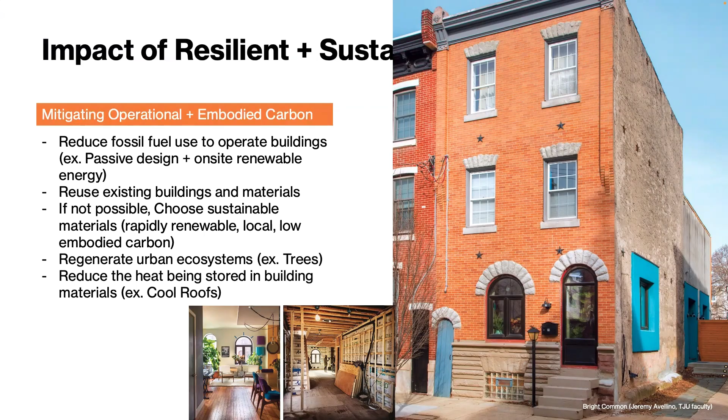So if we can't reuse existing buildings and materials, then at least choose sustainable materials, ones that are rapidly renewable, that are local, and have low embodied carbon. We can also regenerate urban ecosystems, again using trees and reducing the heat being stored in buildings. We can install cool roofs on these buildings as well.

I also wanted to let you know, Philadelphia doesn't only have commitments to reduce emissions by 2050, but design professionals have also created a Philadelphia 2030 district where we have committed, it's nationwide. Cities can elect to be into this and make a commitment, and Philadelphia has.

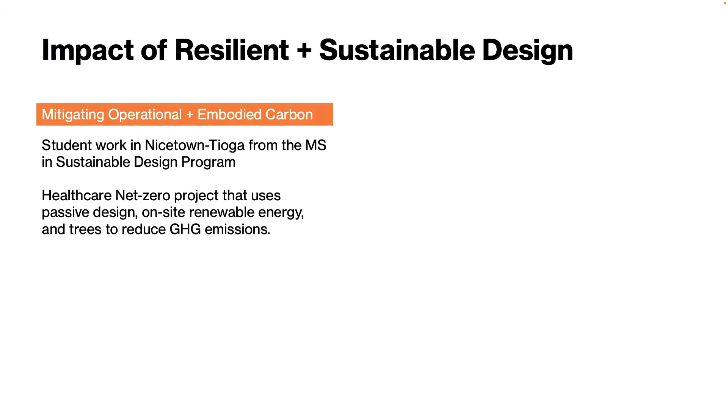So I just wanted to give you an idea using student work and what they're learning how to do. This is a project in the Nicetown-Tioga neighborhood. It's a healthcare net zero project, a cancer infusion therapy center that uses passive design, on-site renewable energy, and trees to reduce greenhouse gas emissions. It also uses a biophilic approach inside the treatment areas to connect patients with nature while undergoing infusion therapy, and connects them to views of the landscape outside.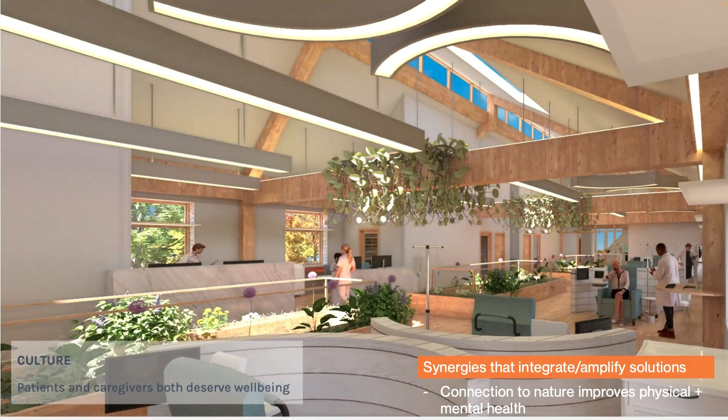So this is what this student had proposed. Again, this is a net zero project with PV panels on the roof, and all of its energy consumption is being met through that. It's also connecting people to nature, improving their physical and mental health.

Adapting to flooding events: the Philadelphia Water Department created the Climate Change Adaptation Program, and as part of this initiative, the Green City Clean Waters Infrastructure Program began in 2011. This is an example from one of their reports about what they do—using more efficient toilets and faucets, and planters and rain barrels outside collecting the water that runs off of roofs.

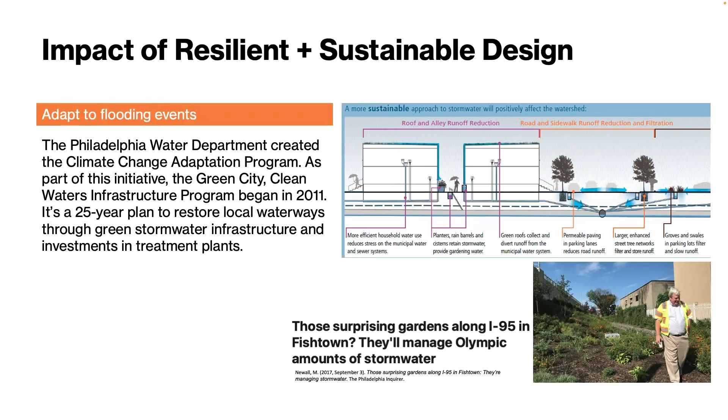You can also use green roofs, permeable paving in parking lanes, larger enhanced street tree networks that filter and store runoff, and groves and swales in parking lots. It's a 25-year plan to restore the local waterways through green stormwater infrastructure investments in treatment plants. One major installation that got attention happened in 2017, involving gardens along I-95 that can manage Olympic amounts of stormwater.

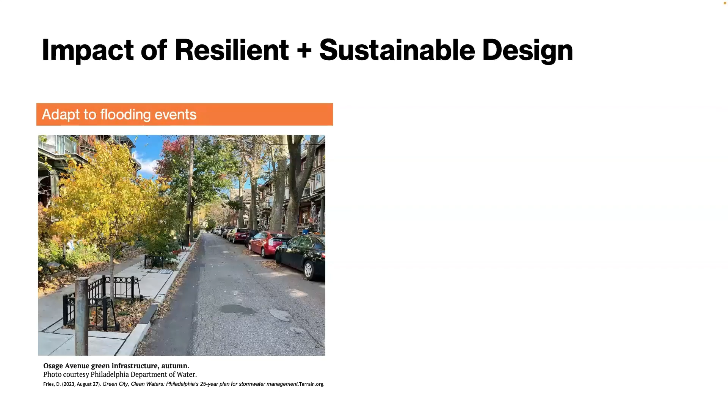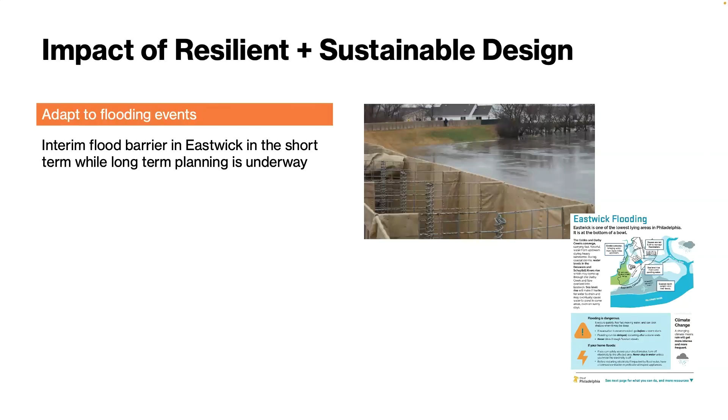Getting back to Eastwick, they are installing an interim flood barrier there. It looks similar to the one photographed here—that's not Eastwick, but something similar—while there's long-term planning underway.

And so we actually did a student project in Eastwick. This was a hospitality project and net zero that uses the landscape as a flood prevention tool for the neighborhood. You can see this is the project site, and these blue areas are locations where water can be stored. The building location is up here, raised about 12 feet above the surrounding area.

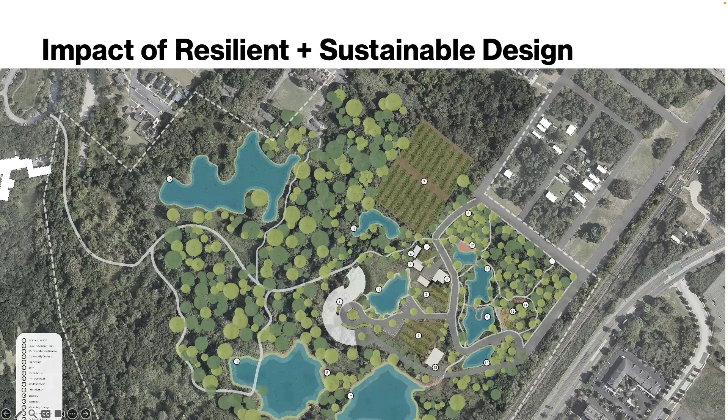That's what a perspective of the site looks like—here's the hospitality building I was just talking about. These areas where you see water collected are the places where stormwater could be stored during a flooding event or major storm, which would otherwise have run into the neighborhood and flooded it. Instead, it's kept here on this site. The student also looked at how this could connect people to nature and improve their physical and mental health.

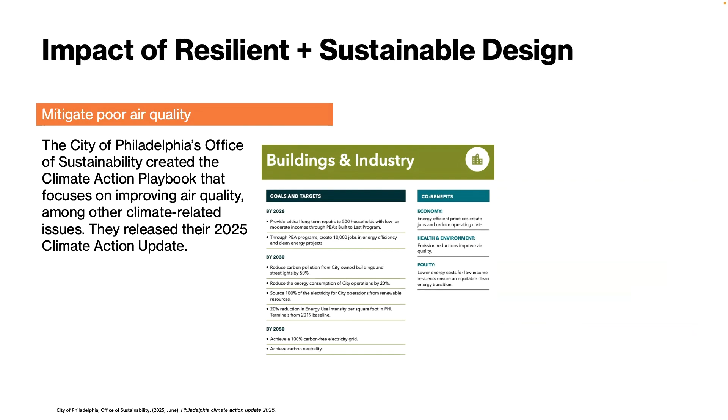Mitigating poor air quality: the City of Philadelphia's Office of Sustainability created the Climate Action Playbook, one focus of which was improving air quality, and in 2025 they had an update. There were things being done in building and industry, as well as nature-based solutions. Looking first at building and industry, by 2026 the goal is to repair 500 households with low or moderate incomes to improve their energy performance and help them achieve higher indoor air quality. They're also looking to reduce carbon pollution from city-owned buildings and streetlights by 2030.

Some of the nature-based solutions include SEPTA's plan to increase its green acreage by 25 acres. They're also going to continue to implement the Green City Clean Waters program, which I just talked about a moment ago.

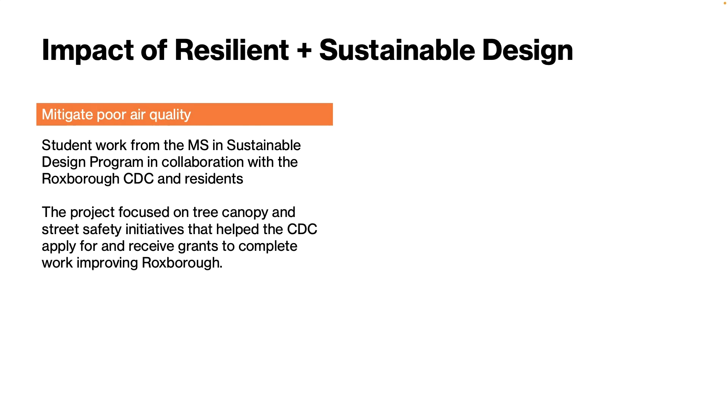And here is some student work. Again, this is work that was done in collaboration with the Roxborough Community Development Corporation and local residents. The students worked directly with the residents to come up with solutions that addressed their major concerns. The community told us that focus needed to be put on the tree canopy and some street safety initiatives. At the end of the semester, the CDC was able to take and use the student work to help it apply for and win some grants to do this work in their neighborhood.

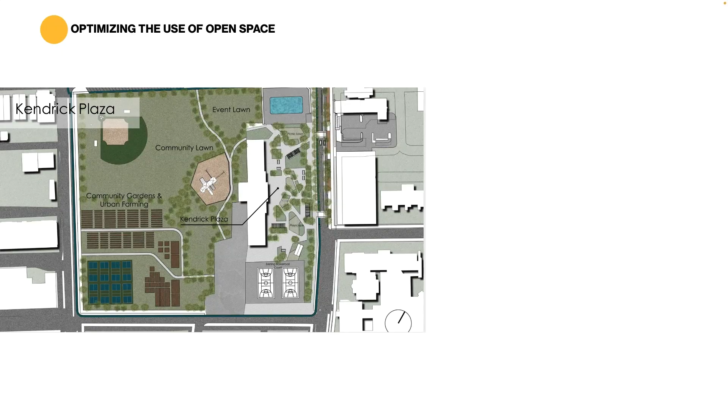We can see here some perspectives of this: the addition of rain gardens along the street and trees, open spaces and additional vegetation that give the community spaces they can activate and use. Instead of it just being vacant and open, they can now have a use. And it also reduces the temperatures.

This is one about mitigating stormwater. This design is along Ridge Avenue. It's a little controversial because it takes a lane of traffic away, but for that lane of traffic, they get a 16 times increase in the amount of planting area, 56% more pervious surface area, more tree canopy coverage — an increase of 33% — and an increase of 300% in parking spaces, which they were able to accommodate in different locations.

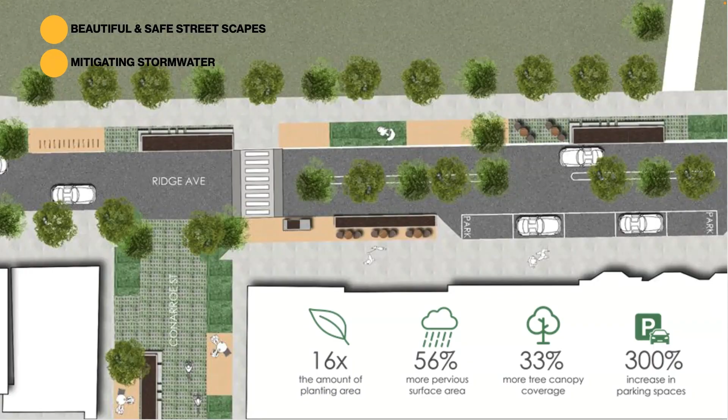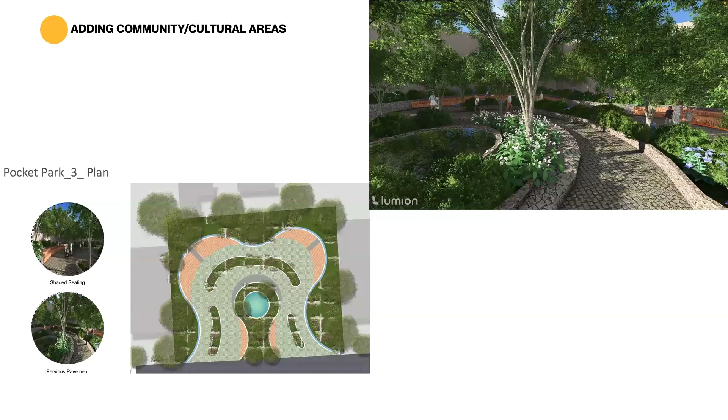The Pocket Park: there were some vacant spaces that were developed into occupiable, usable outdoor spaces that the community can use to bring together for different kinds of events and to also decrease the urban heat island effect. These types of installments also help with stormwater. And again, all of this connecting people to nature improves their physical and mental health.

So at the beginning, I said this was a major point that I wanted to make sure you understood at the end of this presentation: that the environment created by a city is powerful and has a very significant impact on our individual and collective lives. Hopefully now you've started to understand how this is true, and that cities can actually be designed to support positive impacts on human health and begin to reverse many of the negative impacts which they contributed to by virtue of their design.

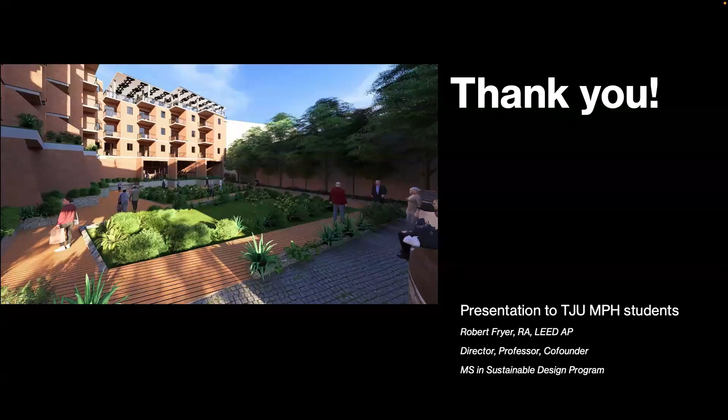I want to thank Professor Fryer for this great and holistic presentation, which really touched on several different aspects of this topic in terms of sustainability, particularly focusing on climate change, health, and design of cities. For me, there were a few takeaways. First, I really appreciated the fact that the environment created by the city is powerful and has a very significant impact on our individual and collective lives — just thinking about things I take for granted, like permeable versus impermeable surfaces, heights of buildings, tree canopy and tree cover, and how these might even impact vector-borne diseases. This is an environment that definitely has an impact on our lives.